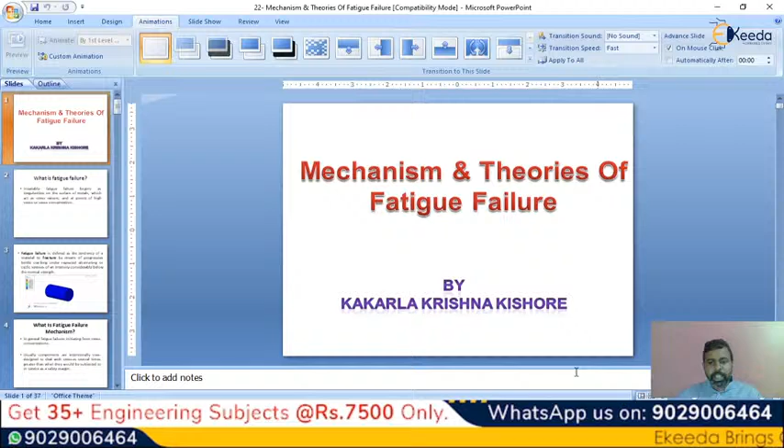So today we are going to discuss the mechanism and theories of fatigue failure in material technology.

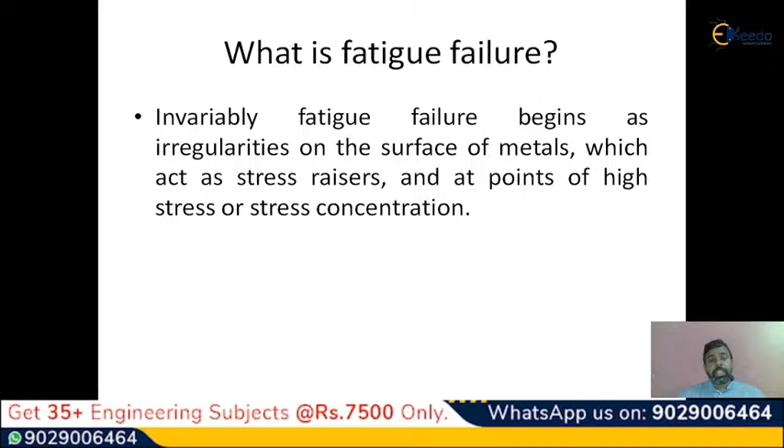Now let me discuss the definition. I already said that you are observing the stress risers on the screen. Stress risers may exist and cause fatigue failure and stress concentration. So you have to observe the areas where stress concentration exists. Now let me discuss with the help of the definition.

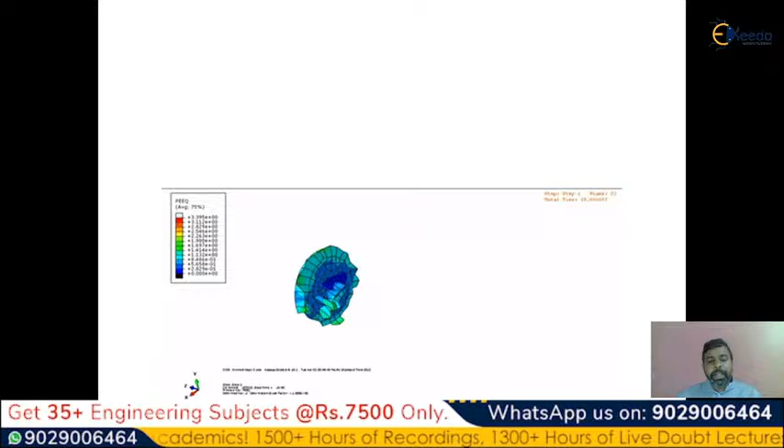First of all, observe the figure here. Load is continuously applied on the material. Because of these loads, after some time, fatigue will be observed in the material, and due to the fatigue, the material is deformed. So please observe the definition first. What do you mean by fatigue failure?

Fatigue failure is defined as the tendency of a material to fracture. It is the nature of the material whenever the load is applied. So you have to take care whether the load is applied frequently, at frequent intervals of time, or at different stages. So what is the frequency of the load?

That is very, very important - how much load is applied on the material, at what frequency the material load is applied. All these are very, very important to study the cracks.

Here, the fatigue failure means the fracture observed during fatigue failure, by means of progressive brittle cracking - please observe that word, progressive, meaning continuous brittle cracking. You can observe in the image the deformation, the crack, the complete permanent deformation of this particular shaft, observed due to the progressive brittle cracking under repeated.

This word is very, very important to understand fatigue failure: repeated, alternating, or cyclic stresses. Cyclic stresses means stresses which are repeated at an intensity considerably below the normal strength. So the strength may not be higher strength, the load may not be the higher load. It may be a normal load, it may be a small load.

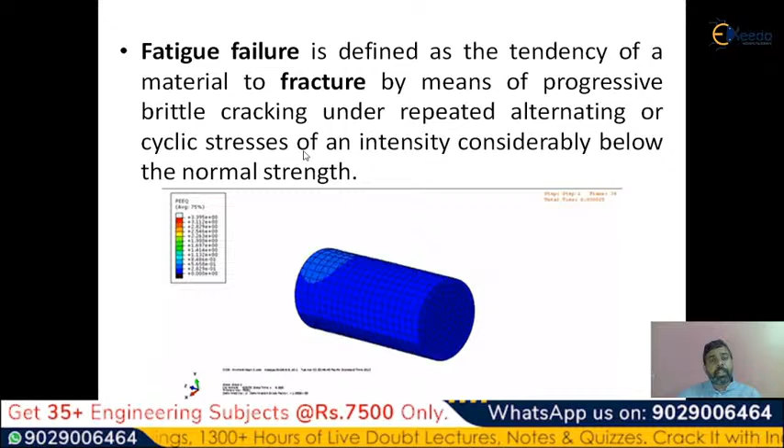But if it is observed on the material for a particular period of time and at frequent intervals, that is very, very important - at what time, at what frequency the material experiences these loads. If the material is experiencing continuous, progressive loads, automatically you can say that after some time this material is going to be deformed. That is very important to understand fatigue failure.

So what is the mechanism behind this? If you want to understand fatigue failure, we have discussed the definition. Now let me discuss the mechanism behind this fatigue failure.

In general, whatever fatigue failure you are observing, it initiates from stress concentration. So what you have to observe is the stress concentration area - whatever stress concentration areas are observed in the material. So what can we do?

We cannot avoid stress concentrations. We can only reduce stress concentration. I repeat this sentence because it is important to understand the fatigue failure mechanism.

I repeat, whatever fatigue failures you are observing in the material, you cannot completely avoid fatigue failure, but you can reduce it. By avoiding, I mean wherever stress concentration areas exist in the material, you have to avoid those areas - those are the starting points of fatigue failure.

Whenever stress concentration areas are observed in the material, automatically fatigue failure will start. The fatigue crack will start from those points where stress concentration exists.

So many salient features are available. Usually components are intentionally over-designed. So what is important here? Design is important - when designing any material, you have to take care that stress concentrations must be avoided, meaning it's designed to deal with stresses several times greater than what they would be subjected to in service, as a safety margin.

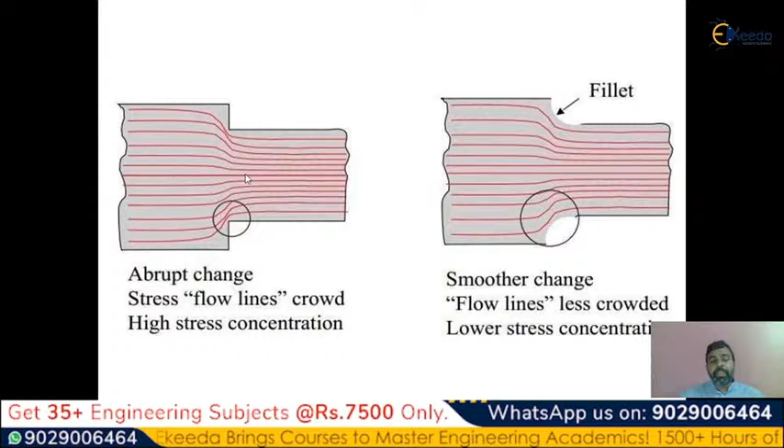These sharp corners can be filled with fillets. That means this design can be modified with fillets like this, so that you can avoid the various fatigue failures that are observed in the material.

So what is the mechanism behind this? We are saying that fatigue is going to be observed, the fatigue crack is going to be observed. So what is the exact mechanism? What are the various mechanisms? Before going to understand the theory behind this, let me discuss the mechanism here.

In general, the basic mechanism in fatigue is slip. That means the background of the mechanism - why is fatigue happened? Why does this failure happen? Why is this fatigue failure observed by the material?

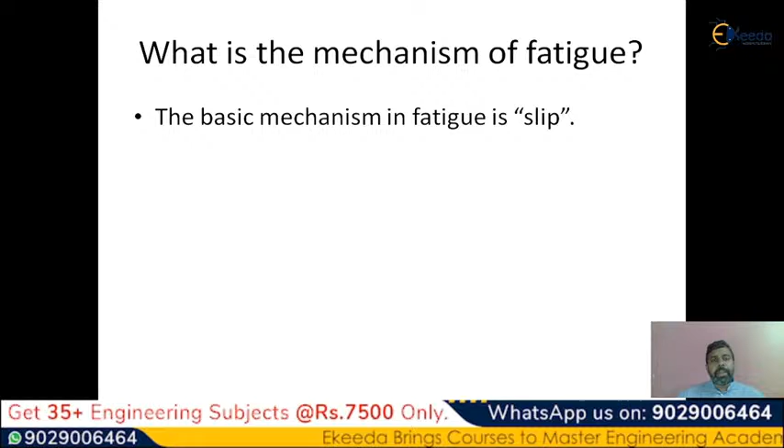Because of the slip. If slip happens in the material, that means if slip bands are observed in the material, automatically we can say that some deformation exists. Some crystals - whatever crystals you have taken in a stressed piece, that means load is applied on the material. Stressed pieces of a metal reach their limit of elastic action sooner than others, owing to their unfavorable orientation, which permits slip to occur.

So whenever slip is observed in the material, it indicates deformation is going to be observed - the fatigue crack is going to be observed. What do you have to do here? The slip - we cannot avoid slip, I repeat, we cannot avoid slip. We can only reduce the slip. So we have to take care of the measurements and design considerations so that the slip can be reduced.

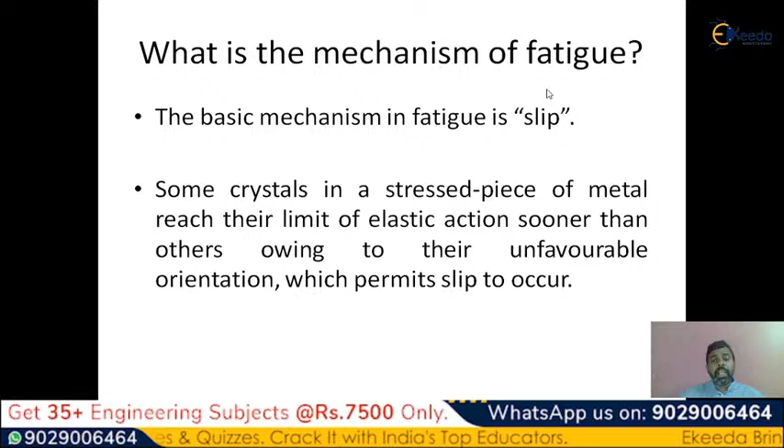So that means the entire mechanism of why this fatigue is happening in the material is because the slip is happening in the material. Now let me discuss, stage wise, the various stages in the mechanism.

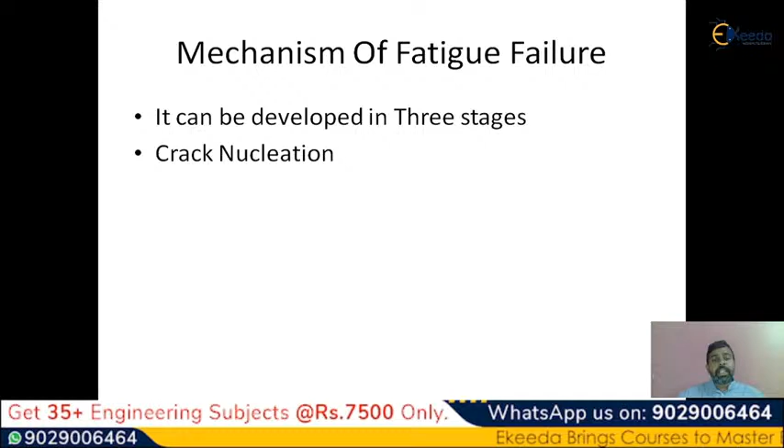The first stage is crack nucleation - that means the crack is going to start in the material. After that, the crack is going to grow; this is the second stage of the fatigue failure. The third stage is ultimate failure. Please observe these three words: crack nucleation, crack growth, ultimate failure. These are the three different stages with which we can say the mechanism of failure is observed in the material.

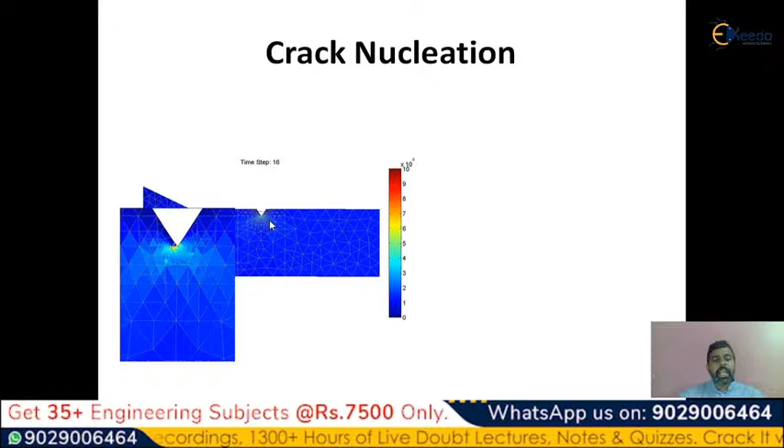Whatever fatigue failure you are discussing, it begins with the formation of a small crack only - it will not start with a bigger crack, it will start with a small crack. This small crack generally occurs at some point on the external surface. So in general, whatever crack nucleation we are discussing, it will start at the surface.

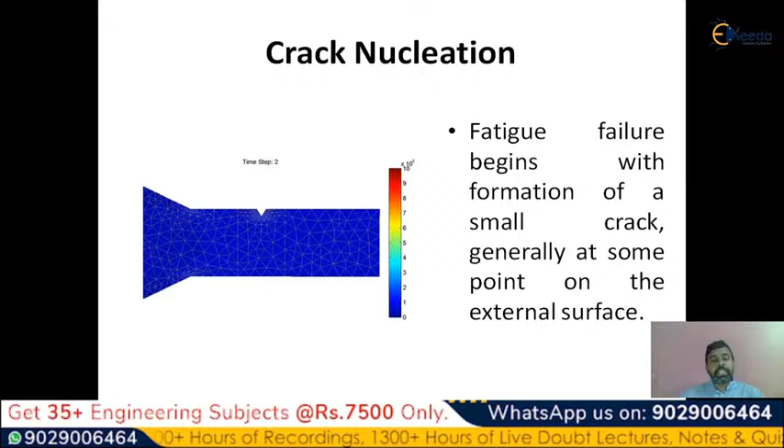In 90% of the cases, this will happen - in 90% of the materials, the crack will nucleate, meaning the crack will start at surfaces. This is the first stage of the crack after repeated loads.

The second stage: once the crack is initiated - please observe the shaft here - the crack is going to grow. This is the second stage. Once the crack is nucleated in the material, it develops slowly into the material in a direction roughly perpendicular to the main tensile axis - see, if it is a shaft, assume it is a shaft.

This is analyzed in ANSYS software, assuming the tensile load is applied in this direction. When the tensile load is applied on the material, in what direction is the crack observed? The crack is observed in the perpendicular direction to the tensile axis. You can see the crack growth clearly in this shaft image, which is perpendicular to the tensile direction.

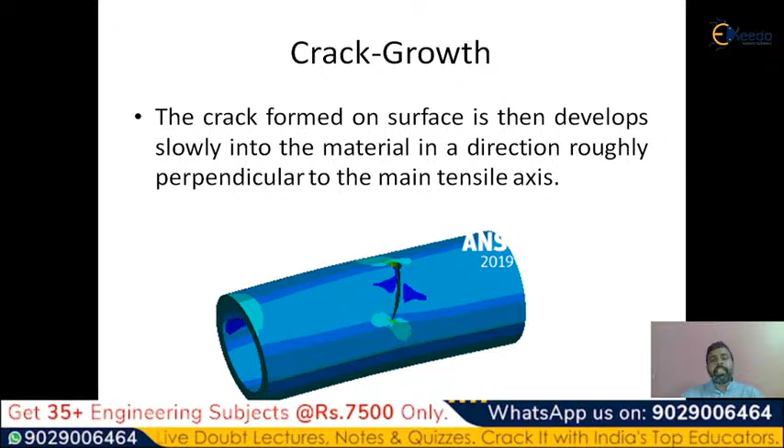Now this is the second stage of the material, that is crack growth, or fatigue failure second stage. The third stage is ultimate failure. In this failure mechanism, the fatigue crack front advances. That means automatically when the second stage is observed, it leads to the third stage.

When it leads to the third stage, a small amount advances during each stress cycle, and the crack accumulates. A small crack starts and grows, and with each increment of advance, the crack becomes bigger and bigger. As the crack grows, ripple lines radiate from the origin of fracture as a series of approximately concentric arcs.

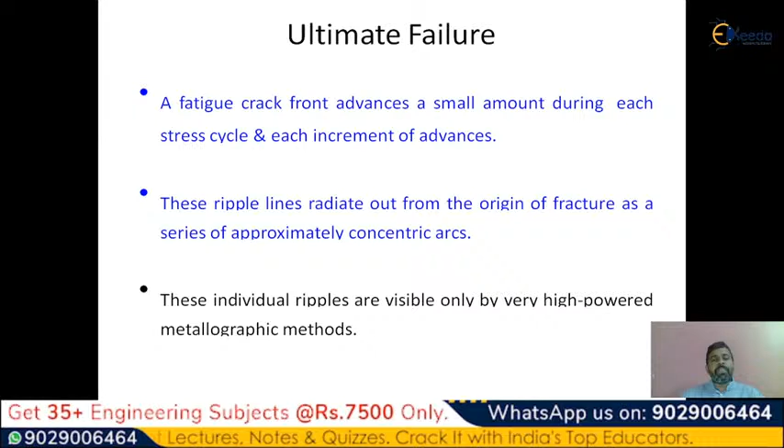So a series of arcs is generated in the third stage, the ultimate failure stage. These individual circular ripples are visible only by very high powered metallographic methods. We cannot see all the ripples generated at the ultimate failure stage with the naked eye, but we can observe them under the microscope or high powered microscopic methods.

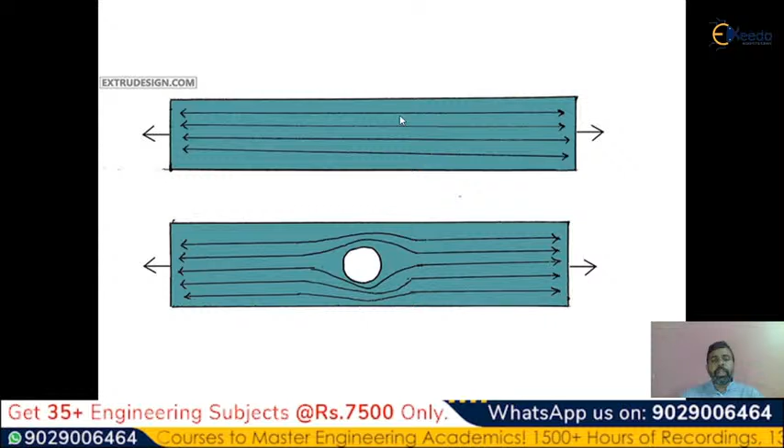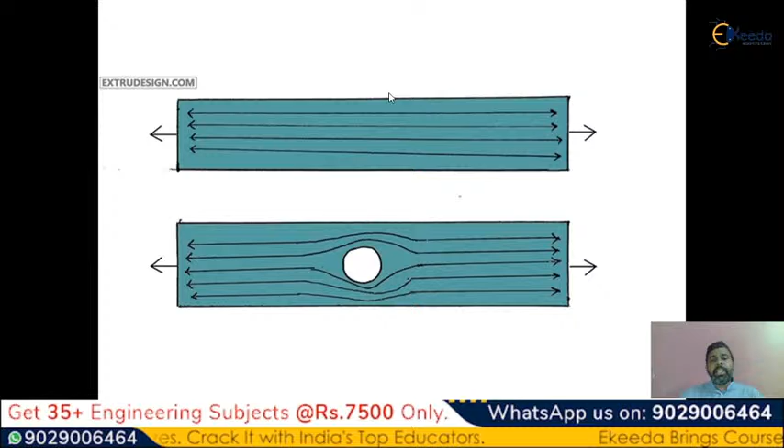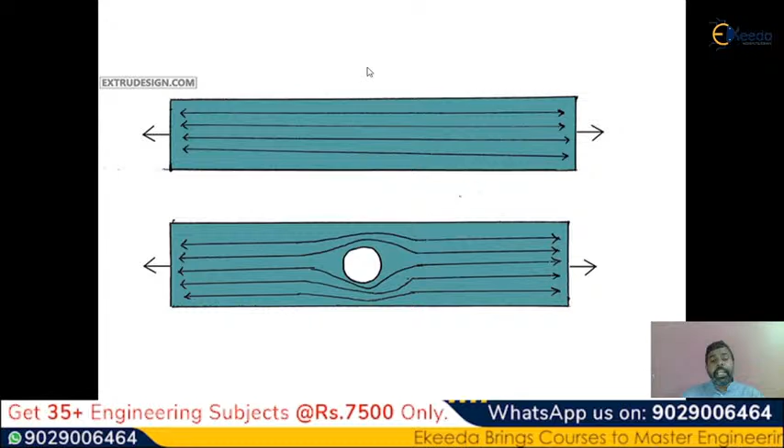Now let me discuss some points developed when the stress raisers, when stress concentration exists, or fatigue failures exist due to localized stress concentrations. Please observe why these stress raisers, that is stress concentrations, exist in the material. Why does this happen? Why do these stress concentrations happen? You can observe the abrupt changes in cross section.

This is the first reason why the localized stress happens: abrupt changes, base of surface scratches, root of a screw thread, edge of small inclusion of foreign substances, and minute blowhole. These are the various causes important to understand localized stress.

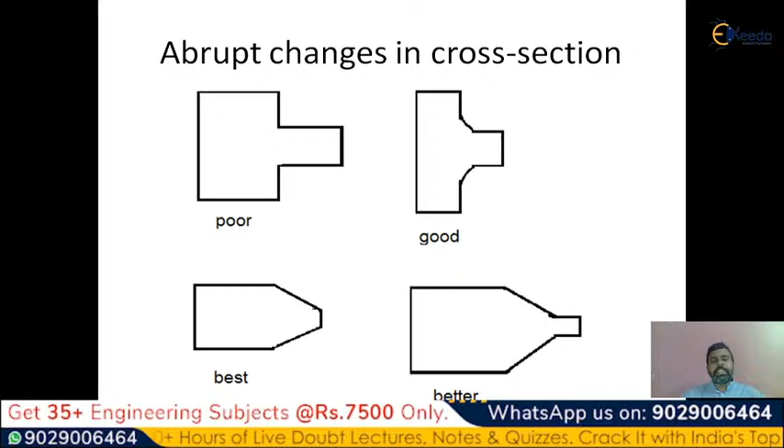That means whenever the cross section changes, you have to take care of the shape and avoid abrupt changes. A smoother design, a smoother change, is required to avoid the fatigue concentration or stress concentration. You can see clearly here why it happens.

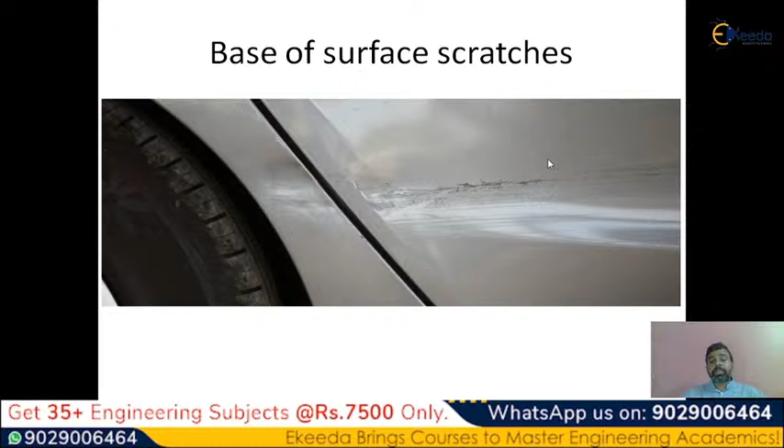The second reason is the base of surface scratches. If you are unable to avoid these scratches, after some time it leads to cracks. So surface scratches also lead to cracks after some time, and you have to avoid these scratches also. Now let me discuss the theories. Up to now we have discussed the mechanism of fatigue failure.

So we have discussed that three stages exist: crack nucleation, that is the first stage; crack growth, that is the second stage; and the third stage is the ultimate failure. So these are the three stages which exist behind the mechanism of fatigue failure.

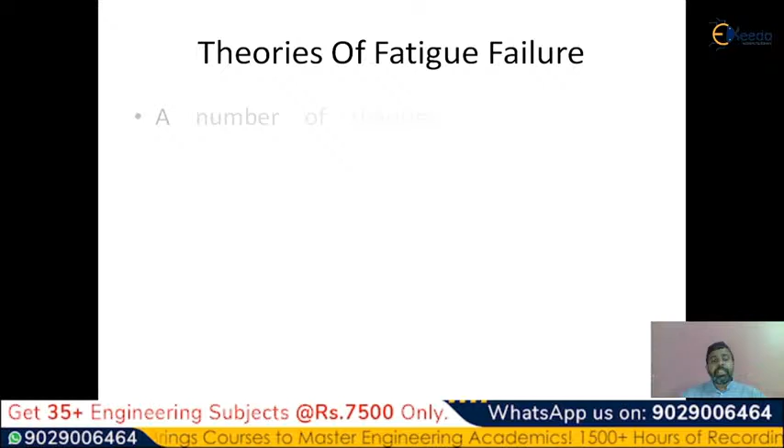Now let me discuss the theories of fatigue failure. So what is the theory? What are the various theories? What are they saying? So please observe, so many theories are giving information regarding fatigue failure. Now let me discuss a few important theories of fatigue failure. So many theories are available.

Here, one theory about fatigue failure is Orowan's theory, the next one is fatigue limit theory, the next one is Wood's theory, and the next one is dislocation movement theory. So these are the four different theories: Orowan's theory, fatigue limit theory, Wood's, or dislocation movement. All these theories describe some salient features of fatigue failure.

These theories say how fatigue failure is observed in their perception. That means different scientists observed various reasons and understood why fatigue failure is observed in the material, and how it is observed in the material. So if fatigue failure is observed in the material, how can we avoid it?

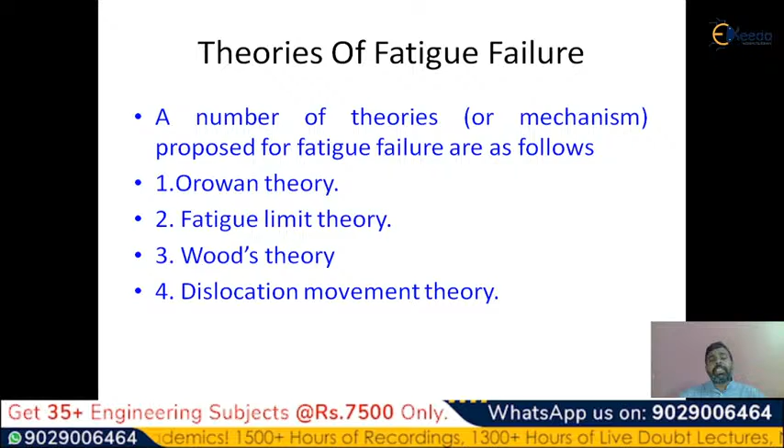Without understanding the background theory of fatigue failure, you cannot understand or reduce fatigue failure. So let me discuss them one by one. The first one is Orowan's theory. First observe the sentence here. According to this theory, the metal is considered to contain small, weak regions along which slip occurs easily. Observe the sentence carefully.

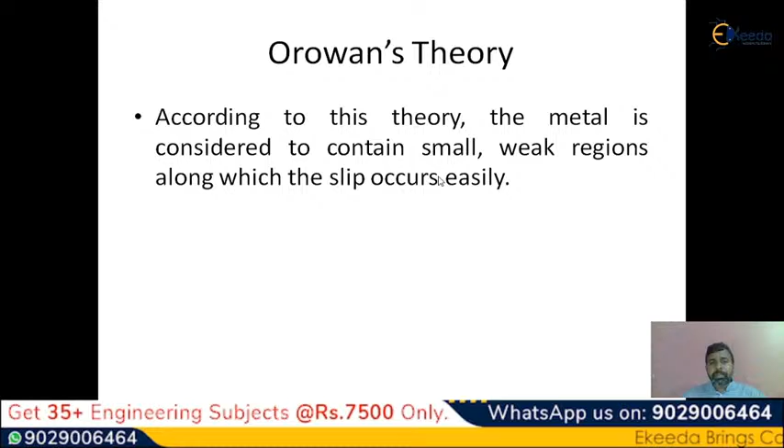I already said that slip is the basic reason why deformation is observed, why the crack is observed in the material. Slip is the main reason. So if you are able to identify when and how slip is going to be observed in the material, and if you are able to avoid the slips, automatically you can avoid the cracks, whether due to fatigue or creep.

Whatever the different fatigue failures or creep cracks, you can avoid them by understanding and by changing some design considerations, by making some modifications, maybe in the manufacturing procedure or the design procedure. By doing some minor modifications, you can reduce these fatigue failures or any other failures observed in the material. I cannot say that failures can be avoided completely; that would be a wrong statement.

We can reduce material failures at least up to some percentage. I cannot say that 100% reduction is possible, that I can provide you a 100% crack-free material. It is not possible for any industry. At least some minor cracks may exist at the initial stage, or may be generated after some time, maybe after 6 months, maybe after 1 or 2 years, on the surface or at some depth in the material.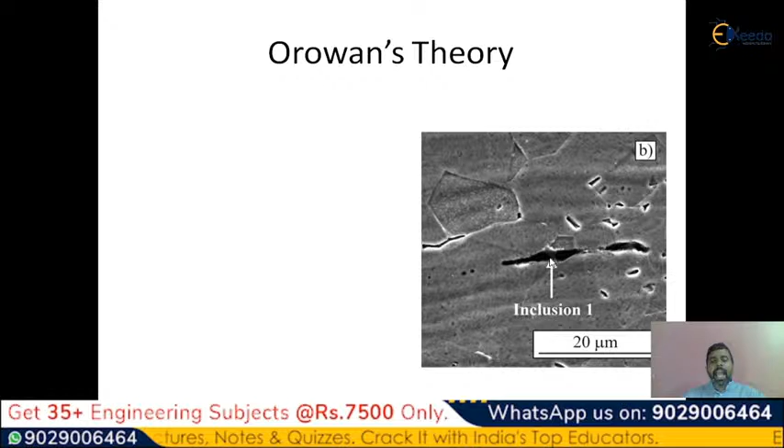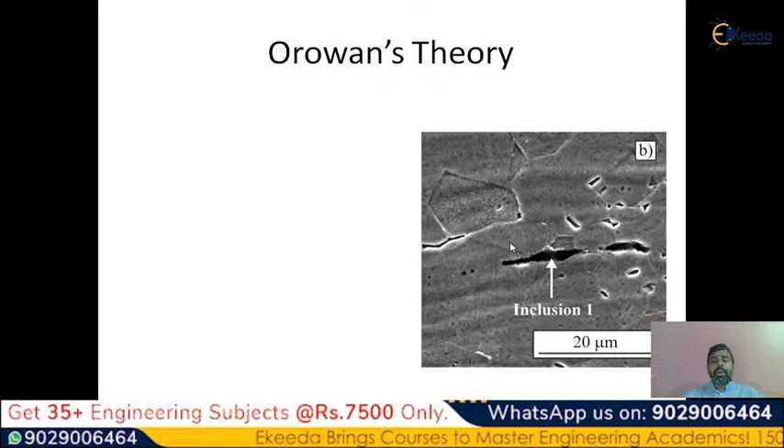You can observe here. This is a microstructural image under a microscope. If you observe here, this is an inclusion. That means a crack is initiated on the inner side of the material. We cannot see this particular crack with the naked eye. So why may this inclusion be generated? This inclusion is generated maybe because it is a weak region in the metal.

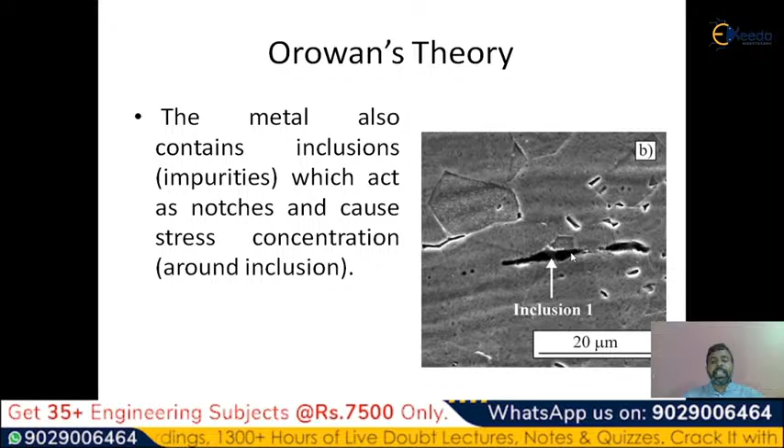That means the metal that you have produced also contains inclusions. Inclusions means sometimes we can say impurities. Impurities have so many definitions. You cannot always say that impurities means it is a waste material. No. Sometimes they are foreign materials also. The second material may act as an impurity.

You can see the sentence here. The metal also contains inclusions, means impurities, which act as notches. So that means how the crack is going to be initiated. If any notch, any sharp corner exists in the material, automatically the crack is going to be generated. Please observe the image here.

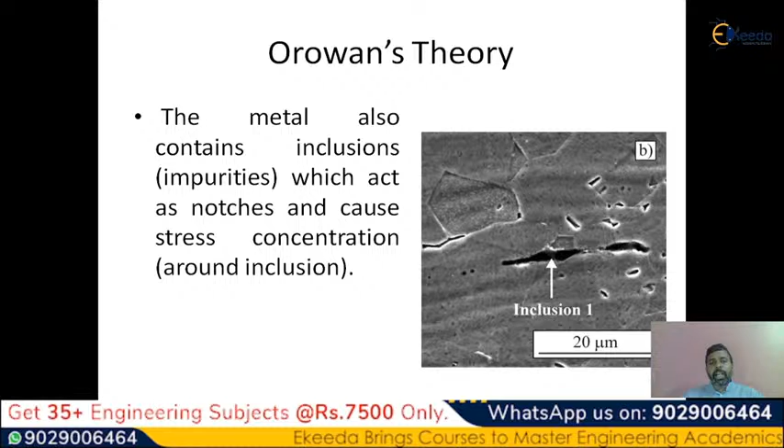This image has an inclusion impurity, the weak region. This weak region acts as a notch and causes stress concentration. Please observe here: around this inclusion, automatically the stress is going to be generated and the stress will increase. When the stress increases, the crack is initiated and grows, and after that ultimate failure may be observed.

And that is what Orowan's theory says. These regions that you have seen are treated as plastic regions in an elastic matrix, and these experience an increase in stress even when the repeated applied stress is constant. Please try to understand this particular point. Even though the repeated applied stress is constant, the stress is going to increase in the plastic region. The increased stress causes plastic strain.

That means if the stress increases in the plastic region, the plastic strain is going to increase in the weak region. It cannot do anything if the material is strong. If the material is a completely strengthened material, with strong regions, then it cannot do anything. Nothing to do with the strong region, nothing to do with the maximum hardness region. But wherever the material has weak regions, automatically the stress is going to attack.

The stress is concentrated in the weak regions, and automatically what will happen? It leads to crack initiation, and the crack regions are going to generate. And whatever plastic strain is generated, if it increases, automatically the stress will increase in the specimen.

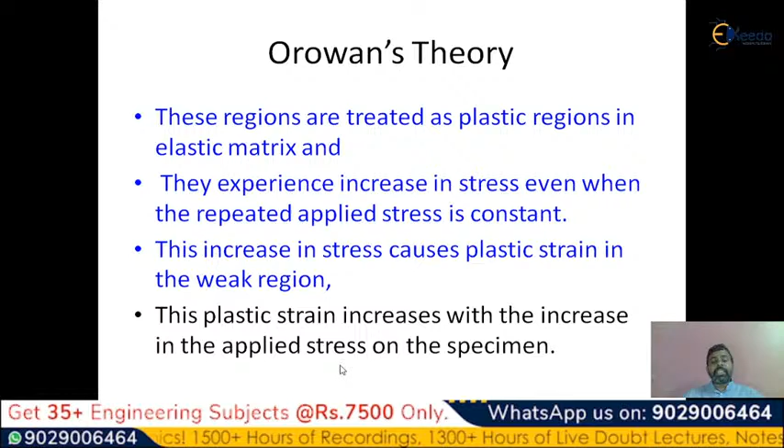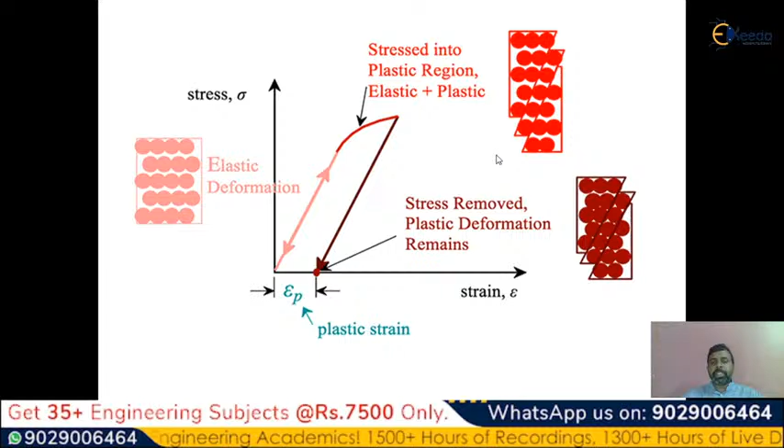Orowan's theory says so many salient features. Here, if this particular plastic strain in the weak region exceeds beyond a certain value, the crack is formed, and this process is going to repeat again and again until the large crack is formed. So this is all about Orowan's theory.

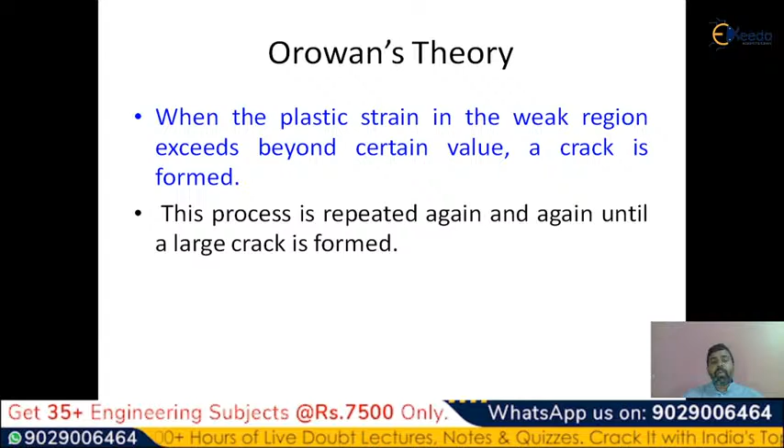So that means the crack is initiated in the plastic strain region, which is concentrated on the weak regions, and the process is repeated again and again until the large crack is formed. Now see the other theory, the second theory.

But for every crack, for every load, for every particular crack initiation, there exists a limit. The material is having some limit. The fatigue crack is having some limit. So the material cannot withstand a particular load. That means it can withstand a load up to some extent, but after that it cannot withstand. That means you have to draw a graph to show the fatigue limit of each and every material. So let me explain what the fatigue limit theory says about this particular mechanism and theories of fatigue failure.

According to this theory, the localized strain aging affects the fatigue properties to a large extent. First, observe the sentence. The localized strain aging effects: whatever strain is going to form, aging effects means due to the time. After some time passes, this will affect the fatigue properties. So how much time you have applied the load on the material is very, very important.

At what frequent intervals of time you have applied load on the material, along with how much load is applied on the material. That is also very, very important in understanding fatigue theory, fatigue failure, or fatigue crack here. So the localized strain aging affects the fatigue properties to a large extent.

We cannot say that all materials are having a fatigue limit. Some metals have a well-defined fatigue limit. So if people are going to do some experimentation, or utilize that material as an end product, we can say how much load can be applied on this material. That is very, very important information for any material.

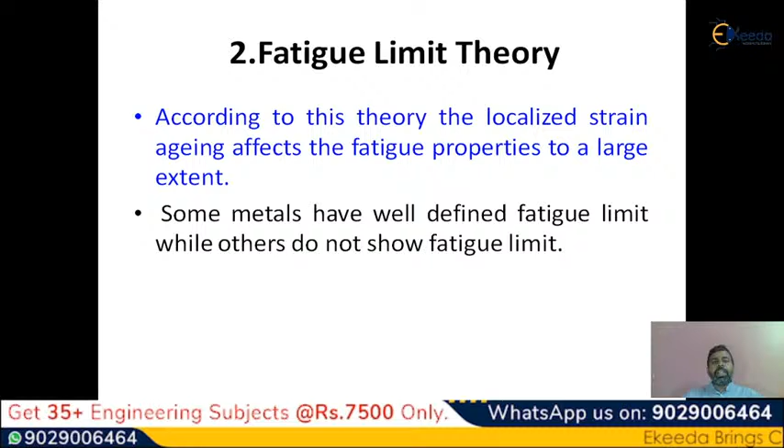If you are not aware of the load, take the example of the bridge. If so many vehicles are running on the bridge and you are not aware of the load the bridge can withstand, then if it is overloaded, the bridge may collapse, or if it does not collapse, a crack may be initiated due to those overloads. After the crack is initiated, the cracks will grow, and that leads to the ultimate failure of the bridge.

That is the bigger disadvantage of fatigue failure if you are unable to identify it. So that's why you must have the complete data on how much load the material can withstand. That is fatigue limit: how much load is absorbed by the material without having any crack. Sometimes this information may not be available. I cannot say that fatigue limit information is available for all the materials.

Suppose you have introduced a new material, you have to take care of the fatigue limit. You have to calculate it by experimentation, by doing tensile test, compression test, fatigue test. You have to calculate how much load the material can withstand. Then only you can say what the fatigue limit is. The metals which undergo strain aging have well-defined fatigue limits.

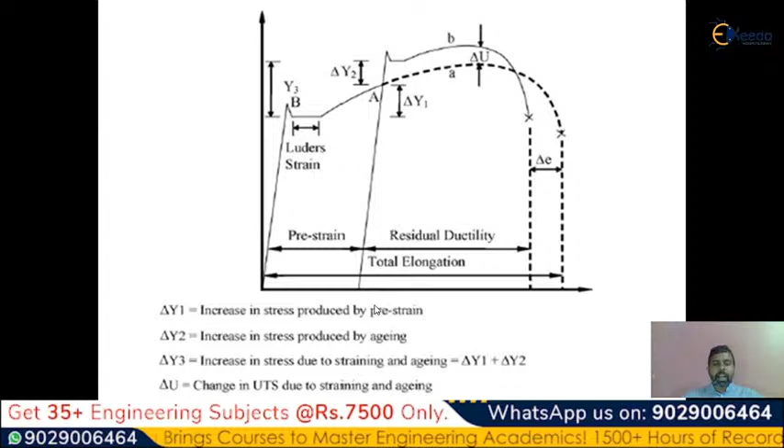So let me explain with the help of the graph here. Please observe the graph. Here you are seeing delta y1. This is the starting point of the graph in stress versus strain, and it will grow like this. This region delta y1 is the increase in stress produced by pre-strain, and the next one, delta y2, is the increase in stress produced by aging. So one is produced due to pre-strain, the other due to time.

If you keep the material for a particular period of time, or keep the same load at frequent intervals of time, delta y2 will be the reason for an increase in stress in the material. After that, delta y3 means the total of delta y1 and delta y2, the change in ultimate tensile strength due to straining and aging. This is the initial graph, the dotted line, but this is the abrupt change if pre-strain exists.

What is the observation that you have done by observing these two images here? Please observe these two images here. The first one starts with the origin and goes like this. This tensile graph, that is a stress versus strain graph, starts like this. If you observe the second graph, like this, what is the difference here?

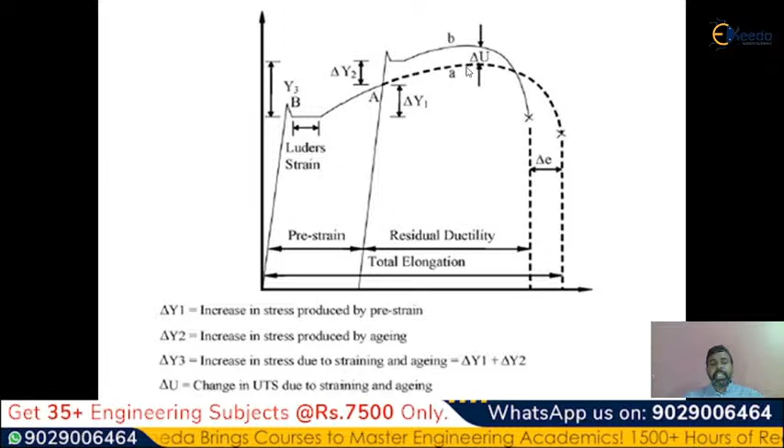See, whatever the material that you have taken to generate this graph, that material is having pre-strain. If the material is having pre-strain, we can say that the graph will start like this, and there is some change, that is a change in ultimate tensile strength due to straining and aging. So this difference is represented as the change in ultimate tensile strength due to straining and aging.

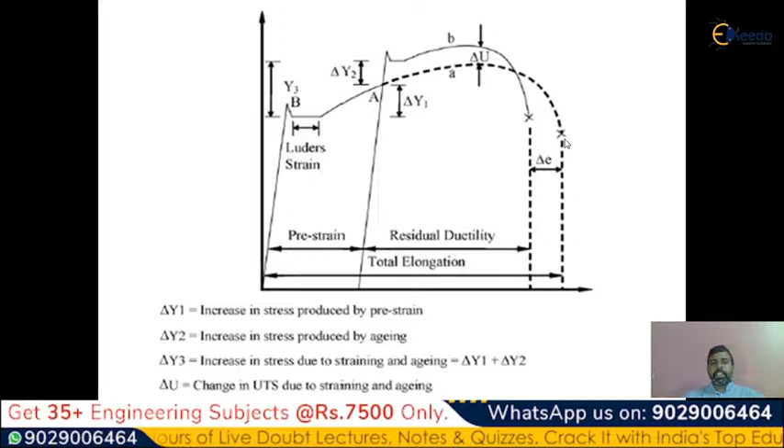So that is the information with the graph, and you can observe the specimens that you have taken with less amount of nitrogen and carbon. Please note down this particular point here. If the material that you have taken is having less nitrogen and carbon, it will have less tendency for strain aging. So if strain aging is less, we can ensure that the stress versus number of cycles curve, that is the SN curve, will not show the fatigue limit for this specimen.

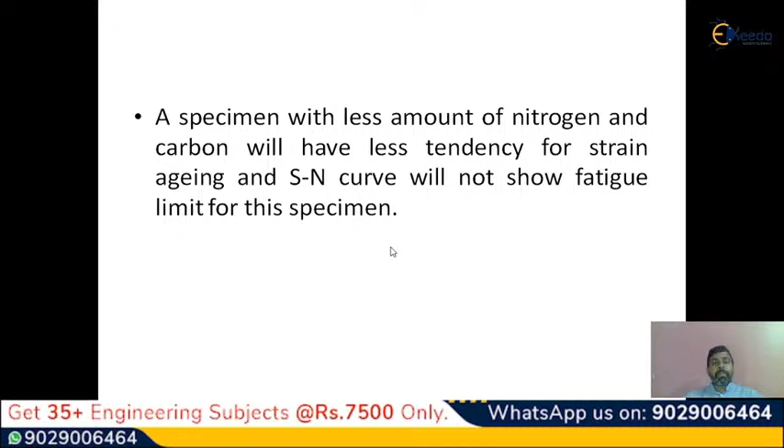These are some problems due to strain aging. Suppose if you are unable to identify the fatigue limit for a material, we cannot identify some of the properties of the material. So please observe the point here, the heat treated steels. Heat treated means heat is given to the material and cooling is provided for the material. Heat treated steels show a definite fatigue limit. So if the material that you have taken is a heat treated steel, then we can say that it shows a fatigue limit.

So if you take the example of a steel, you can observe here, this is a heat treated steel, it is showing some limit here, the endurance limit, at what particular stress, and the stress will be constant. On the x-axis, number of cycles, and on the y-axis, stress. This is an SN curve, stress versus number of cycles.

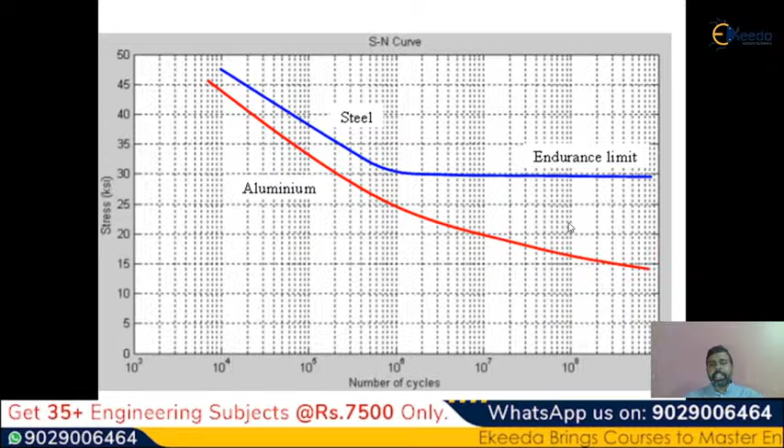You can observe the aluminum curve here. It is not showing any endurance limit, because if this is not heat treated, automatically the endurance limit will decrease like this. And the stress is also very less compared to steel, and here also the stress is not constant. You cannot say a particular stress and a particular fatigue limit. That's the big problem. That is all about the second theory, that is the fatigue limit theory.

Now come to Wood's theory, what it says. Before going to understand Wood's theory, consider this statement here. Try to understand this statement. The strain direction, that means the deformation direction, in fatigue is reversed again and again. Suppose in any material it is deformed in the front direction and again it is reversed. So the strain direction due to fatigue is reversed again and again.

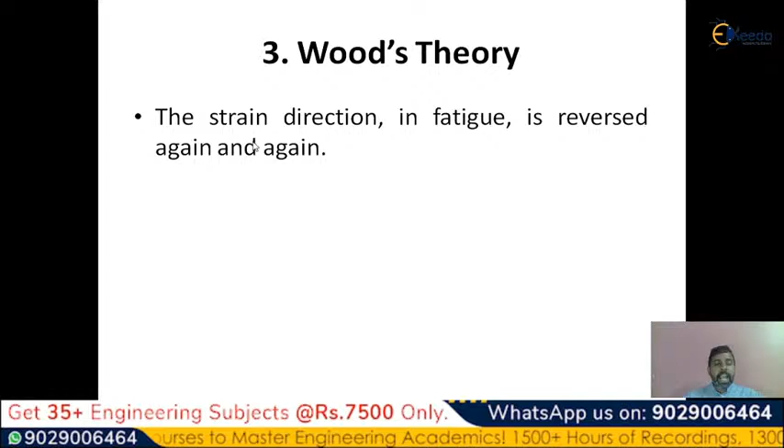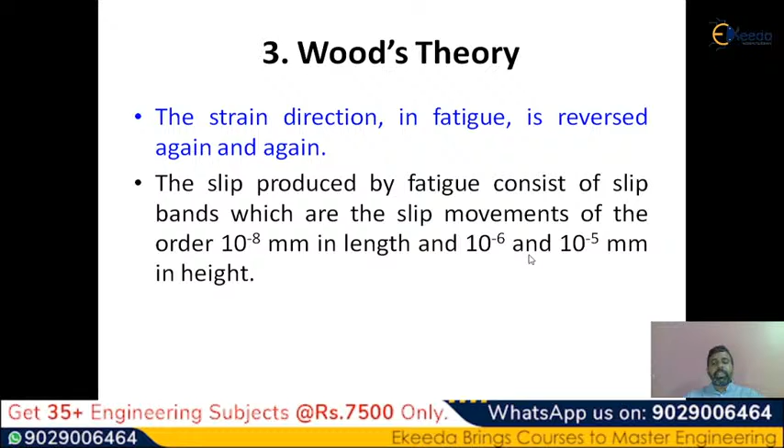Automatically what will happen? Slip is going to be produced, and because of these repeated strains again and again, automatically the crack is going to be generated. So this is what Wood's theory says, and he says that the slip bands are slip movements of the order of 10 power minus 8 mm. He says about the length. This is the length, and 10 power minus 6 to 10 power minus 5 mm in height. Around this height, the slip bands may exist.

And it also says that when there is a strain in one single direction, the steps that appear are simple. Suppose if it is only in a single direction, the identification of slip and identification of crack is going to be very simple. But the problem is the strain direction is not in one direction. The strain is moving in the forward direction, again in the backward direction, forward and backward. So it is going to be repeated, reversed in its direction again and again.

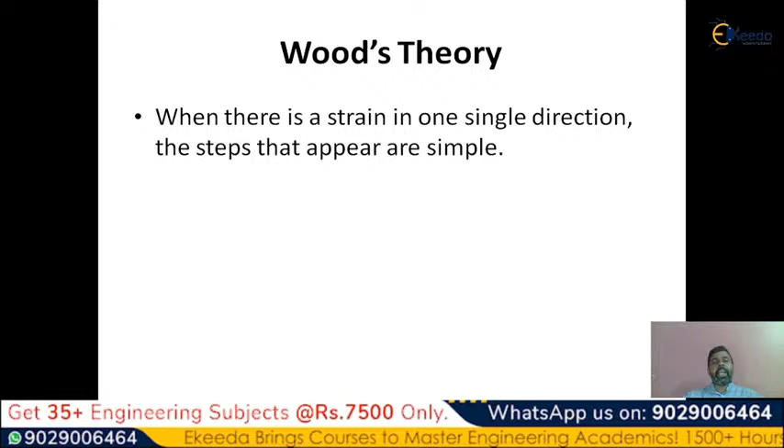If it is done again and again, automatically some problem may be identified. So that means here, when the loading is cyclic, the slip bands tend to group as notches. That means the slip bands themselves act as notches, they act as ridges. Then from those notches, the crack is going to be generated.

Wood says that due to the strain in forward and backward directions, the slip bands create the notches. I will show this in terms of the figure also. Due to the forward direction of the slip band and the backward direction of the slip band, or the forward strain and the backward strain, the notches will be generated. The notch acts as a starting point for the fatigue cracks. So these notches are very dangerous.

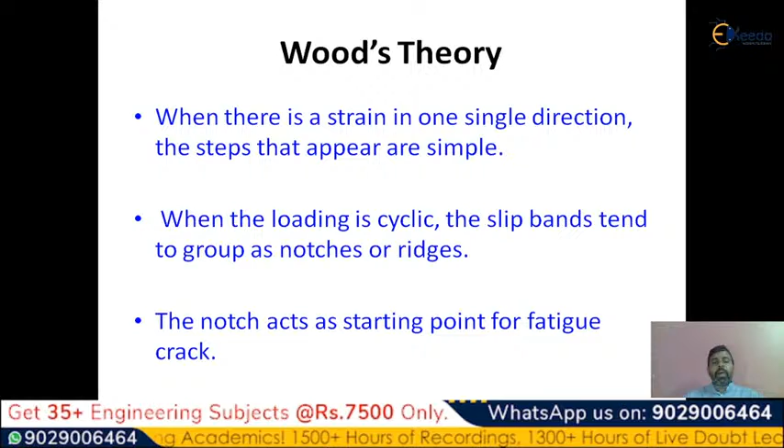If you are unable to avoid or reduce these notches, automatically the entire material is going to get cracks. See, whatever notch is going to be generated here starts with a very small root radius. You cannot identify it with the naked eye. That's the biggest problem. That's what the Wood theory says. The notch will be generated, so a very small root radius acts as a stress riser.

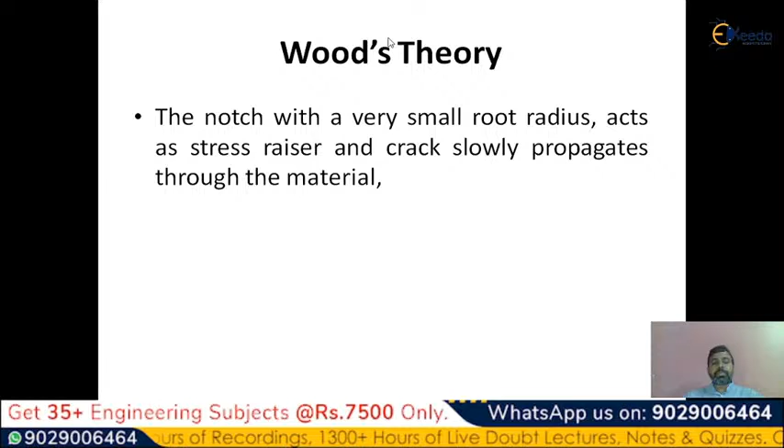I already said that these notches act as stress risers, stress concentrated areas, and the crack slowly propagates through the material. So that is going to be the biggest problem for the material. Now you can observe here. It also says that after some time a stage will come when the remaining portion of the cross section is too small to bear the maximum load. Any material cannot bear the maximum load.

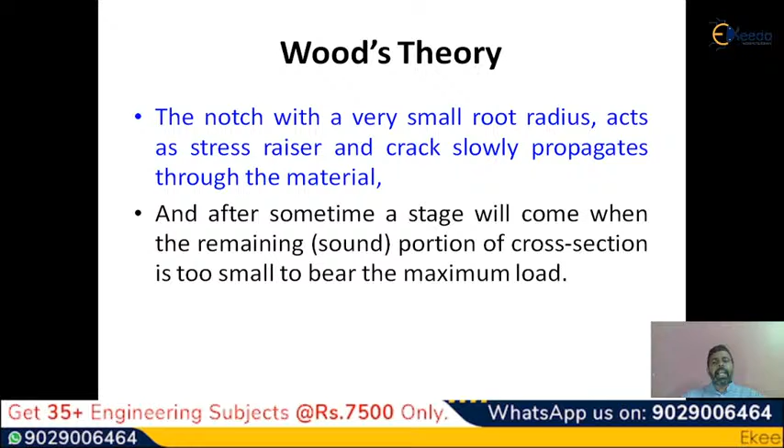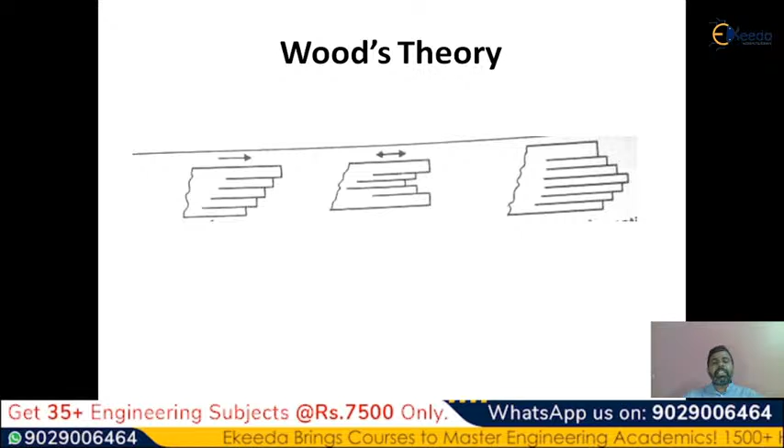If the slip band is going to move in the forward direction, and again in the backward direction, any material can't withstand it. That's the problem. At this point, the failure may be observed. The final fracture is usually of a cleavage type. You can observe here. These are the slip bands in the forward direction and in the backward direction, so that means to and fro. Some bands move in the forward direction, some bands move in the backward direction.

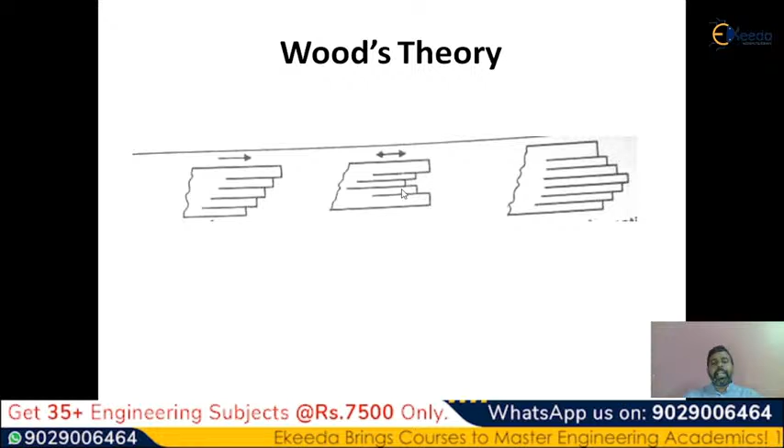The Wood theory says that if this happens, the crack will generate. These slip bands act as notches or edges. Automatically, the crack is going to be generated because of these slip bands. This particular mechanism is described by Wood, and the crack will be generated, and ultimately the fracture is going to be observed in the material.

The next one is the dislocation movement theory. This is a very understandable and important theory about the failure mechanism. See, in any material, if the dislocation movement is not restricted, you cannot avoid the fatigue failure or the creep failure or whatever failures are observed in the material. I repeat, if the dislocation movement is not restricted, you cannot avoid the cracks observed in the material.

So what is important here? The dislocation movement must be arrested. We cannot say that dislocations can be avoided. I repeat this particular statement, which is very important: we cannot avoid the dislocation. We can only restrict the movement of the dislocation. The next question is, what will happen if the dislocation movement is restricted?

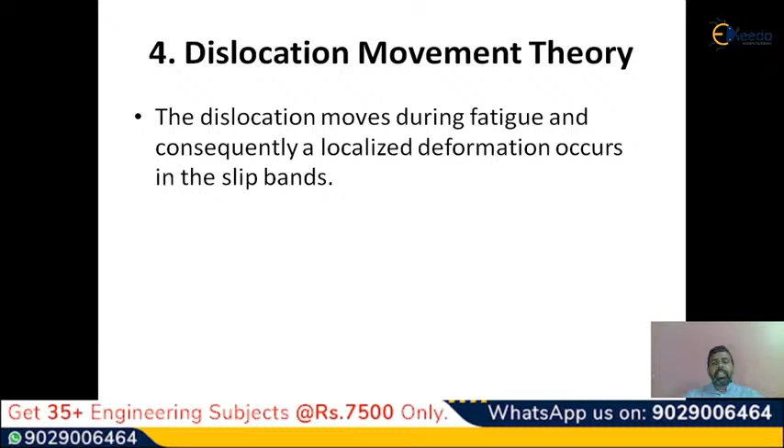If the dislocation movement is restricted, automatically we can say that the cracks can be reduced, at least up to some percentage. I cannot say that the cracks can be reduced up to the maximum percentage, but we can say that the cracks can be reduced. Here the localized deformation will happen. So let me explain this dislocation movement theory.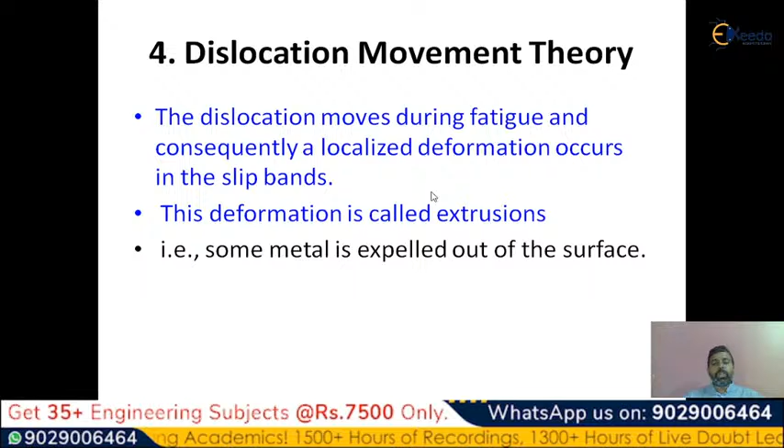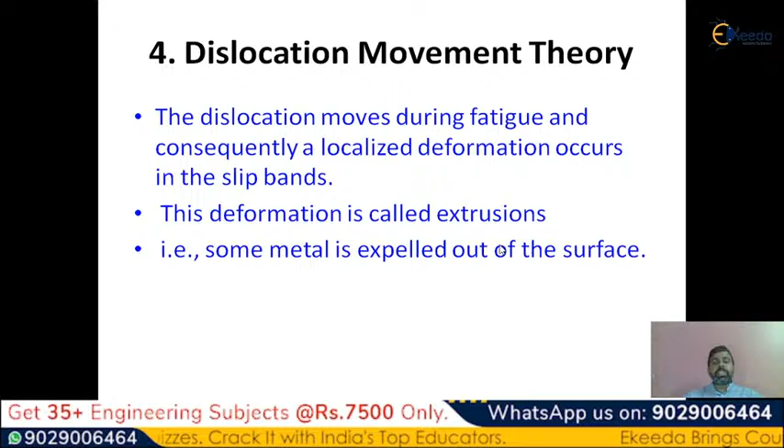Whatever deformation is observed in the material because of the dislocations is called extrusions. I repeat, these are represented as extrusions. What do you mean by extrusions? Due to this dislocation movement, some metal is expelled out of the surface. If any metal is expelled out of the surface, that can be represented as an extrusion because of the dislocation movement. So please observe the image here.

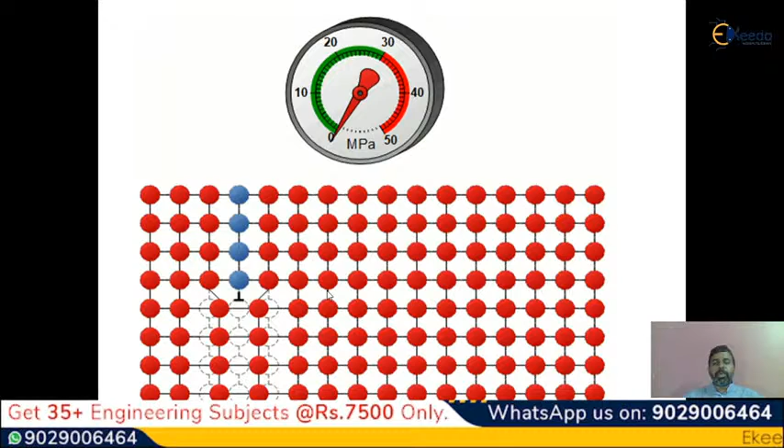Some atoms are missed. This is called dislocation movement. Because of this, extrusions happen, which are represented here. Sometimes these may be the inverse of extrusions, represented as intrusions. Whatever the extrusions or intrusions, these are responsible for the initiation of the crack. If you are unable to restrict the dislocation movement in the material, the crack cannot be avoided. If you are able to reduce the dislocation movement, the crack can be reduced.

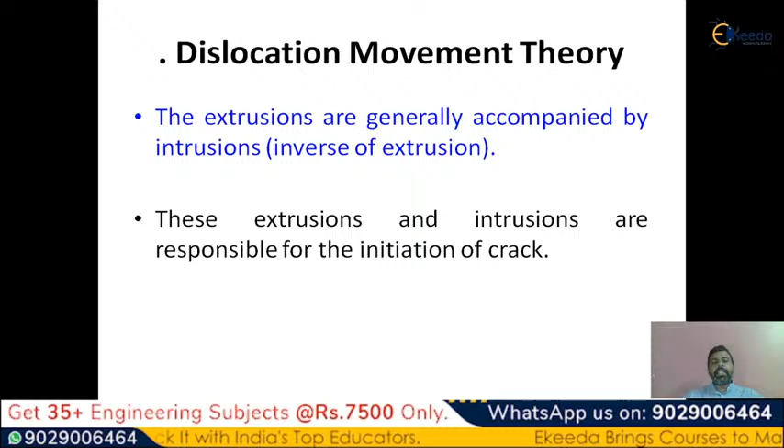These are the extrusions, expelled from the metal surface, and some slip bands are reversed in the opposite direction. If it gets back in the reverse direction, these are called intrusions. If it is expelled from the surface, that is called extrusion. So this is extrusion, this is intrusion. It may be extrusion or intrusion because of the slip planes.

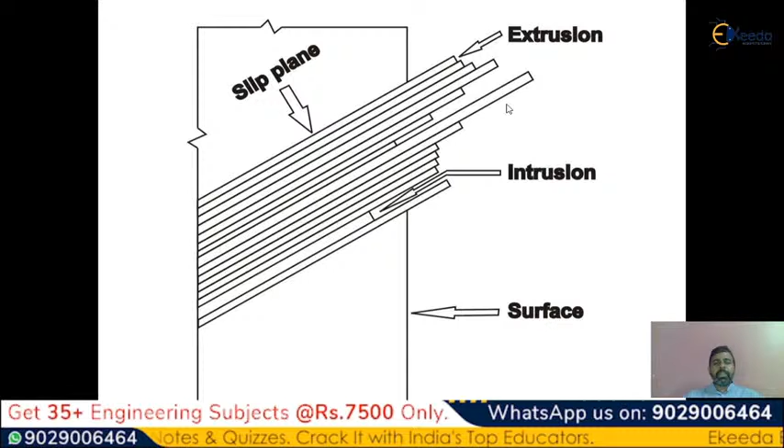So the crack that is going to be generated in the material will be generated due to extrusion and intrusion. This is the surface, and this is the theory behind dislocation movement. So dislocation movement has to be restricted first. If you are able to restrict the dislocation movement, you can avoid the extrusions or intrusions that cause crack initiation. That is very important.

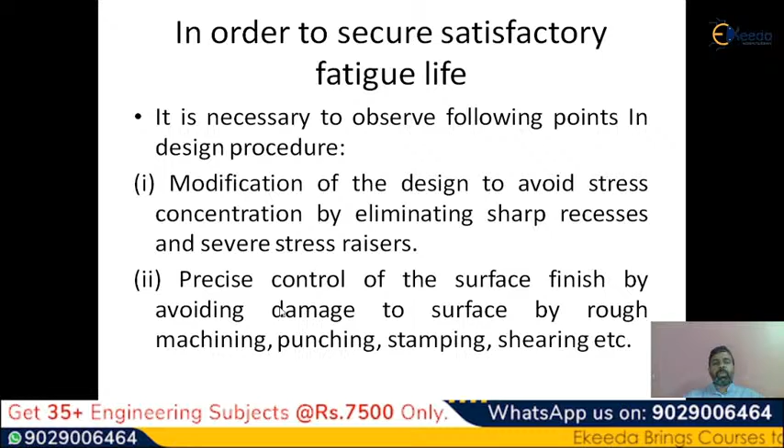In order to secure satisfactory fatigue life, you have to take care of modifications in design to avoid stress concentration, by eliminating sharp recesses and precise control of the surface finish. That is important to avoid damage observed on the material. If you are unable to maintain proper surface finish, that leads to cracks, maybe by rough machining, punching, stamping, or shearing. So you have to take care of the surface finish and the crack initiation to reduce stress concentration.

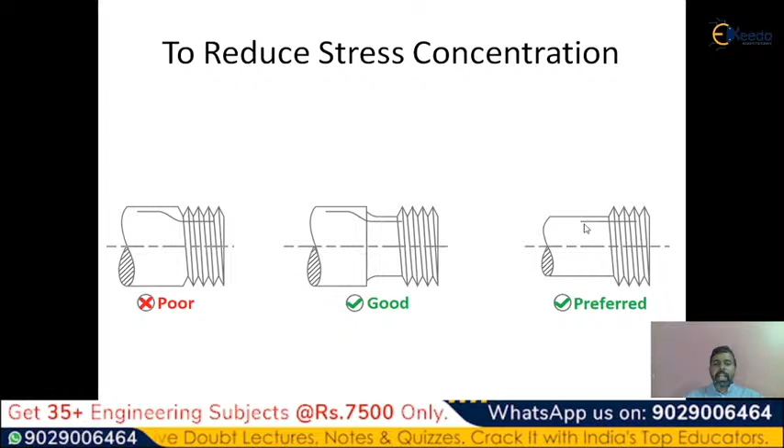As I said, you have to avoid sharp corners like this. This is a poor design. This is somewhat better compared to the previous one. If you want to provide threads, this is a poor design. This is somewhat good compared to the previous one, but this is the best design, preferable compared to the others. Here you can observe the shaft and the thread axis are almost in line. You can say that the crack initiation can be reduced, but I cannot say that the crack can be fully avoided.

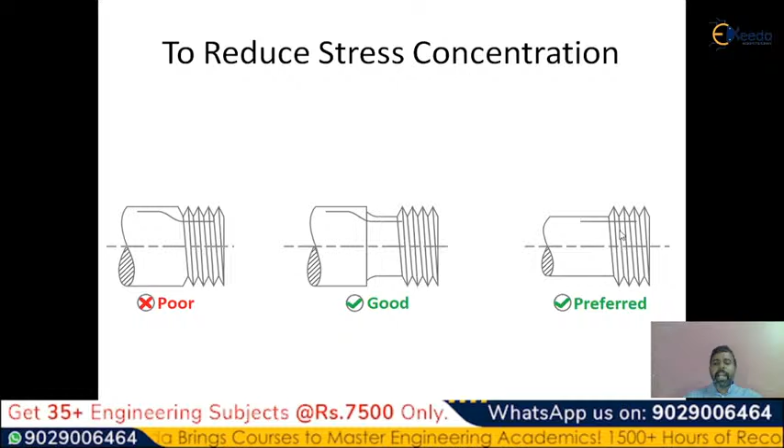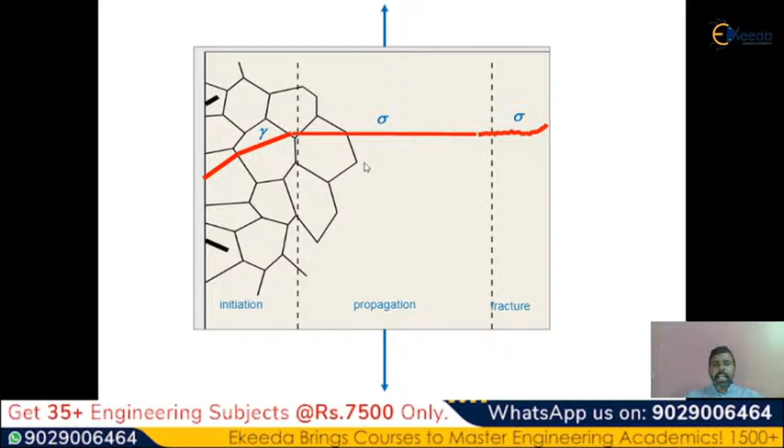This is the initiation of the crack, and this is the propagation of the crack. If you want to restrict the crack, you have to understand all this theory - Orowan's theory, Wood's theory, fatigue limitation theory, and the dislocation movement theory - and this is the mechanism of initiation. If you are able to avoid it at the first stage, the crack initiation stage, we can reduce the fatigue failure of the material.

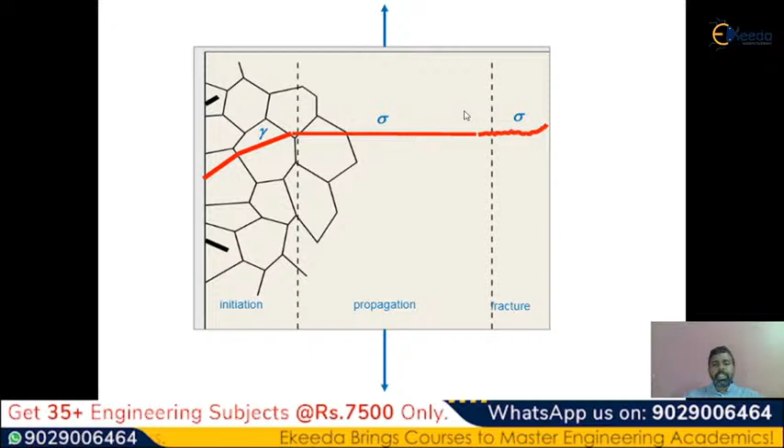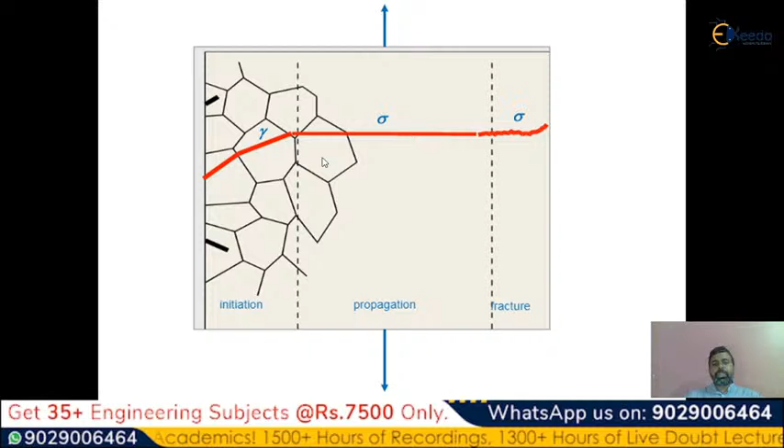So the propagation will proceed like this. Sometimes it depends on the material, on the resistance of the material. Once fracture is observed, this is the third stage of fatigue failure. So you have to take care of the material so that at the initiation stage itself, the cracks can be reduced. This is all about the mechanism and theories of fatigue failure.